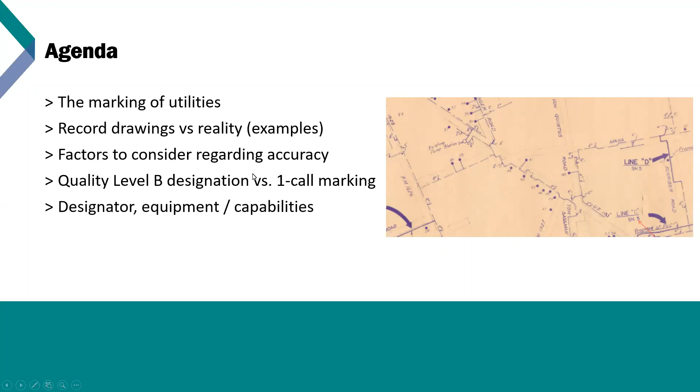I'm sure everybody is probably familiar with the one-call system. My intent today is not to knock the one-call system, but just to kind of maybe explain a little bit more to folks who might not be completely familiar with how things work.

The one call guys have a very tough job. These folks are typically asked to show up to 30 to 40 different sites a day and mark anywhere from one to multiple utilities in a very short period of time. I'm sure also, as most people have experienced, they probably had some issues with getting folks to mark the lines if they're calling a design ticket or even for excavation, as well as lines being mismarked.

A lot of engineers use the survey or the design ticket. This is a free service. The issue there might be is that there might be 6 owners that show up on the ticket, but it's pretty typical for only 3 or 4 of the owners to actually come out there and mark their lines. Some may even call or may even respond to the ticket and say there's no conflict because they know there's going to be no excavation.

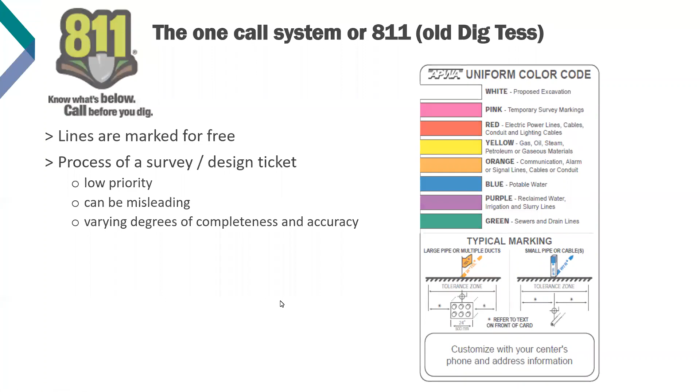So with all that said, if I was a designer, I certainly wouldn't have a very good comfort level. The intent here is just to impress the need to always at least request records. The interpretation of the records is another issue.

If you call in a design ticket and have surveyors collect those marks, they're considered quality level D, which is the lowest quality level. Even though one-call folks use, for the most part, the same equipment as a SUE person, there are several reasons the ASCE doesn't necessarily trust the accuracy of that information. They don't trust that those folks have been properly trained, and they don't trust that the equipment has been maintained or is regularly calibrated.

This often leads to some very bad results, and the reason for that is just experience from many folks. As you can see in the marks there, in the pictures, the picture on the left is really confusing.

If you were to go out there in the field and see the electric mark in red in the center of that island, and then you have a phone duct mark right at the curb line, well, one's on top of each other. But it's a pretty good chance that those aren't actually on top of each other.

As you look a little bit to the right, you have another set of phone duct marks, and the gas guys marked on top of the phone. Again, I think it would be pretty unlikely that those two lines are buried in the same trench. That really makes it tough for someone to distinguish what's good and what's not good.

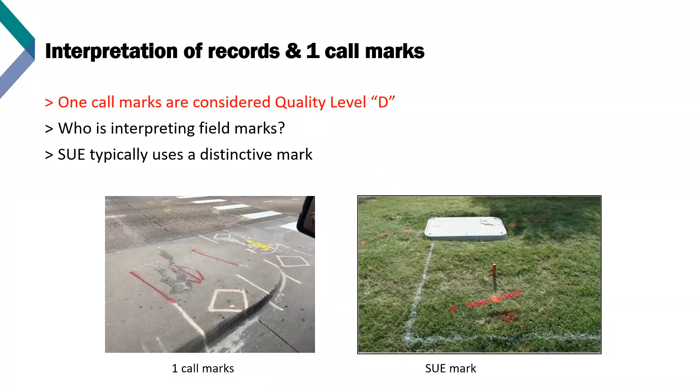There are very often misleading marks out in the field. In this case, crossing an entrance to a neighborhood, the person marking the electric ducts has 14 separate marks going across the curb line, spread about 12 feet wide. Well, there's a pretty slim chance that there are that many cables spread that far apart.

You'd be much more likely to find, if you were to dig a hole there, something like in the picture below, where there's just a couple of conduits - these red lines here - not more than probably 3 or 4 feet across. So again, if you're excavating or designing there, that's some very conflicting, very deceiving information.

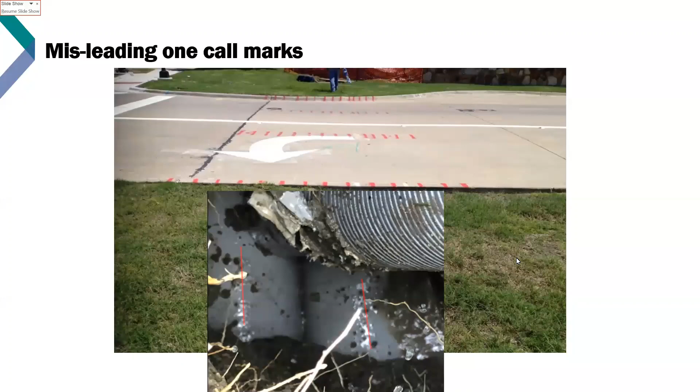So more confusing marks, similar to the ones on the previous slide - electric marked on top of phone. This one's a little clearer picture of what we just looked at, but I just came across this the other day, and I was just trying to figure out, wow, what the heck is going on here? How did somebody do this?

Again, there's a variety of different marks - the 3 lines in red are trying to indicate primary electric. The marks with the diamond in the middle, are they trying to indicate a duct bank or just a single duct? Again, very, very confusing if you're out there trying to interpret what's going on.

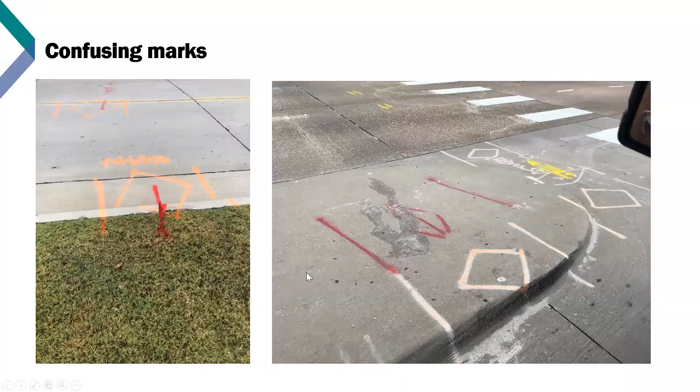Another example of the utility congestion and an issue that everyone faces, be it a utility locator, a one-call locator, a SUE technician, or a designer, is congestion. This actually is right outside of my office, where I think there's 10 different fiber optic owners who have structures all very close to each other. And it's just a congested nightmare out there. If you were to try and interpret all the marks, some of the marks are a little faded there in the picture.

I think even if you were to ask and request records from these folks, you would get a wide variety of accuracy of records, anything from maybe just an orange line on a Google Earth map to possibly an as-built that gave you a distance back of curb. But it would be very tough to compile all that information because all levels of accuracy would be so different. There'd be a lot of interpretation needed there. Again, kind of the reason for this presentation today is to focus on the issues of interpreting records and field marks, so that a designer can have accurate utility information to work from.

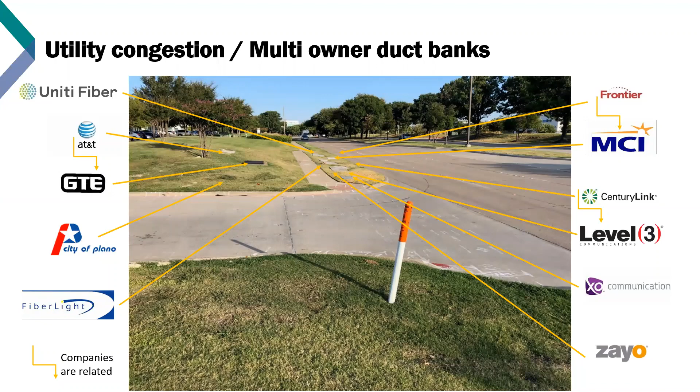Another picture in a very similar area. Just sometimes it's amazing to me how many lines are in the ground in some of these areas. Oftentimes these multi-owner duct banks will have lines that are running together in the same duct bank. In this case, while the structures are close together, the lines spread out for almost 30 feet, almost from the back of the curb, 30 feet behind it. So really, if you're using a design ticket or don't have an SUE person, or hire an SUE firm to map all this stuff, you could get a wide range of utility mapping to use.

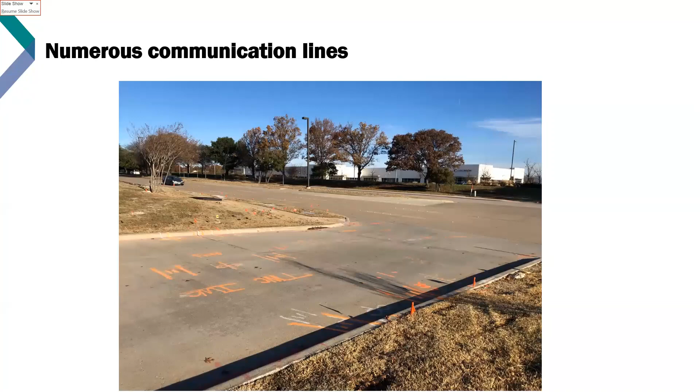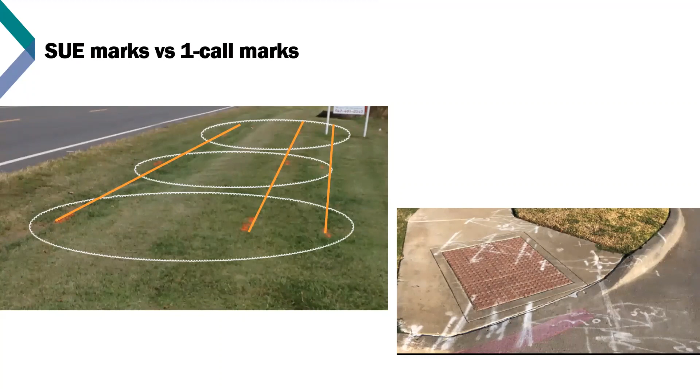I think a big question that I always have when somebody sends me a file and they have utility lines shown on it, the first thing I always ask is, where did this information come from? Was it compiled by a junior engineer, an EIT, by a CAD person? How did they come up with it? So to me, that's just really critical to know that up front. You can get some very, very misleading information on these types of drawings. There are some very obvious symbols, such as B, to indicate buried, but unless you know some of the codes to tell you if the line is overhead or buried, the size of the line, distances between structures, etc., it's very difficult to incorporate this information into a topographic drawing.

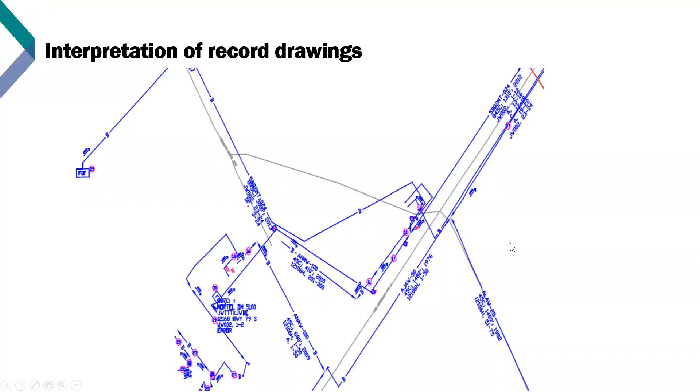It's kind of amazing that this information, or the way that they recorded their information now. It's obviously a secrecy thing, but it really makes it tough for anybody who has to use this record drawing and is worried about utility conflict.

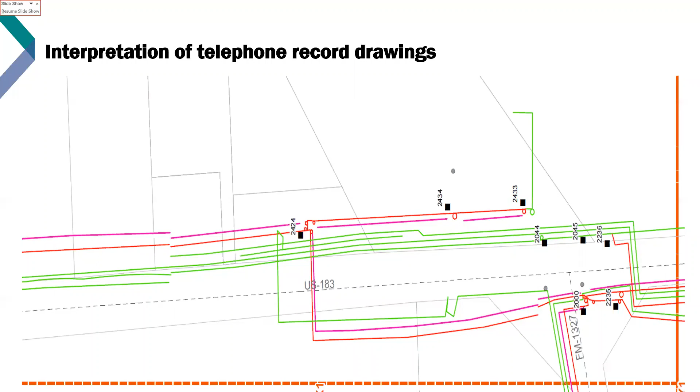This drawing, actually in scale, covered well over a mile. Luckily, it was only a 2-inch water line, so it wasn't anything critical or hard to relocate, but it wasn't traceable. It was plastic, and it was just amazing and surprising for a utility owner to provide a drawing of this level of accuracy, or I should say lack of accuracy.

As it ended up, once we pushed them a little further, the client felt it was going to be in conflict with some culverts they were extending along this road. The water owner then came forward and said the water line is outside of the right of way other than where it crosses the road. So initially, while the client had us digging probably 10 test holes, almost all of them went away other than at the point of crossing. Just a very interesting example of some of the information you get from folks.

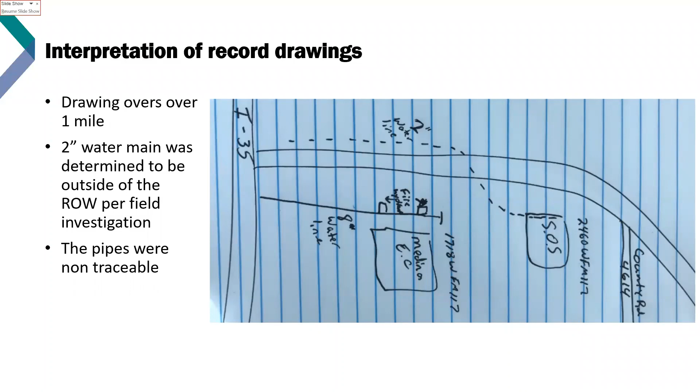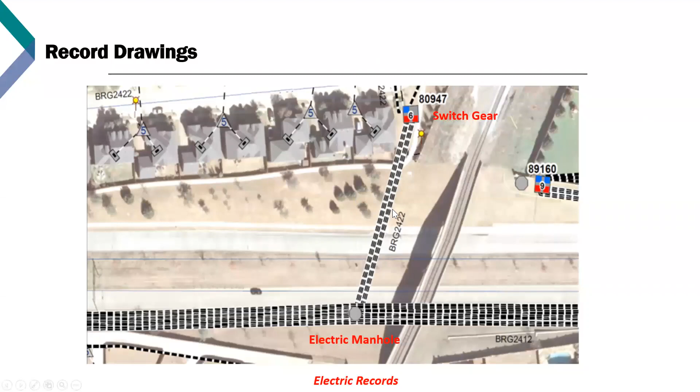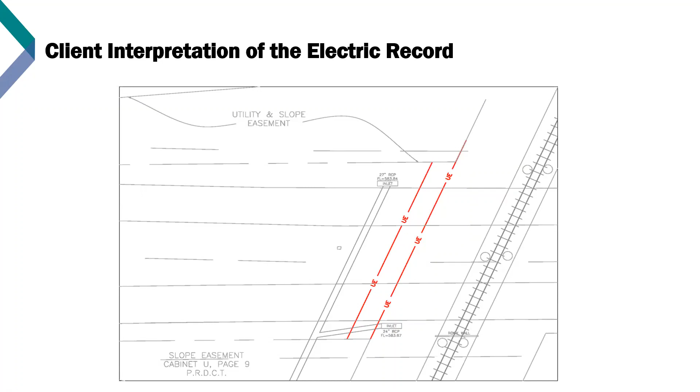They took this information, and the two red lines with UE on it were their interpretation of these two lines that cross the road here. So their interpretation was pretty reasonable and realistic, and they were ready to start their design based on this. But then we were asked to go out and actually map the utilities ourselves, and the line was over 100 feet off, and the alignment was drastically different than how the record showed it and how the owner depicted it.

What this ended up doing was they were going to do some work on the drainage here and in these inlets, and by finding the line where we did, it ended up saving them a couple of test holes. So I can't impress enough the importance of using an SUE provider to get accurate mapping, as opposed to relying on the call system or utility company records.

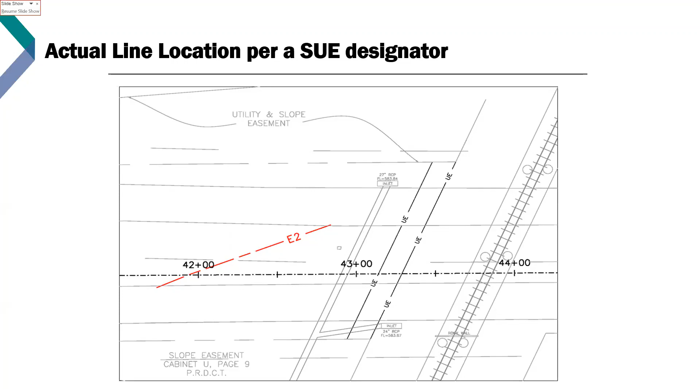Our crews went out, staked those locations, but before they dug, they pulled their equipment out to mark the line, and they found it 16 feet off. As it turned out, they didn't need the holes. But since they thought their information was correct, they asked us to excavate the holes anyway, and we did just to confirm the line. Had they requested a quality level B initially, as opposed to quality level A, they probably could have gotten the information they needed for about half the price.

I think when people see utility records, or marks in the field put down by the one-call folks, they take it as the gospel, and a lot of times the information is very inaccurate.

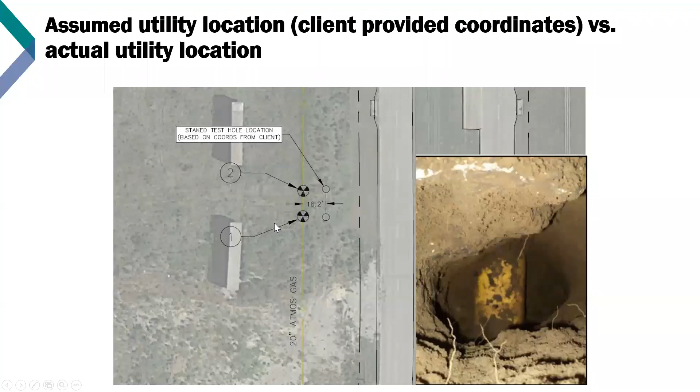I've come across two instances where I found issues. One, the Railroad Commission indicated 3 lines crossing a brand new roadway, so we were asked to excavate on those 3 lines. As it turned out, there was only evidence, only signals, only marker posts on 2 lines. I went back to the Railroad Commission and let them know, and upon further investigation, they determined that the person who added the information had accidentally duplicated one of the lines, so they ended up removing a line. They probably showed that mapping for about 5 miles.

I also recently went on a project south of Houston, in kind of what I'd call a pipeline alley area. The Railroad Commission showed 8 lines crossing our project, but as it turned out, we found 11. There was one owner who was not identified, and 2 of the owners had multiple lines where they showed just 1 line. So again, no intent here to knock the Railroad Commission—it's a great resource, a great website—but the point is just to not necessarily believe everything you see on paper.

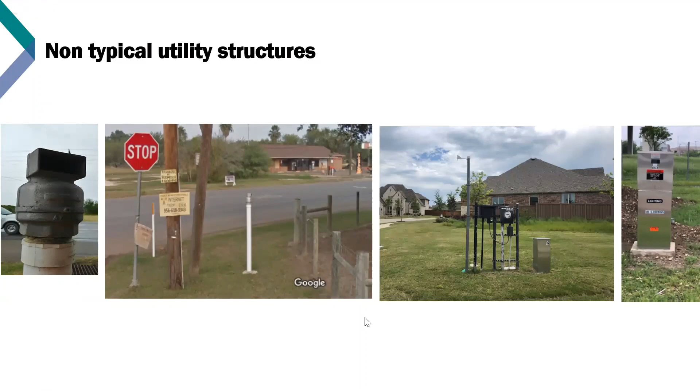Again, more on utility structures and the correct identification of them. A lot of times I've seen structures like these called out as just the infamous green box. Some are labeled pretty good — in this case the owner's labeled. It's always good that the surveyors or whoever's collecting the information knows ownership. But it's really important to get the utility right, whether it's phone, electric, cable TV, or whether it's a handhold. It's really important that this information is relayed correctly.

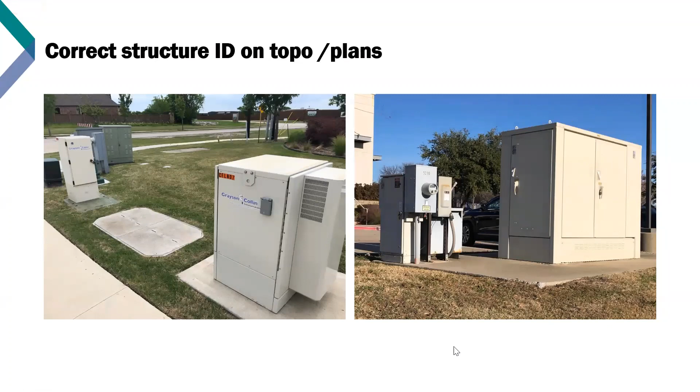I had a job where we were in quality level C and D, just adding information per records for a client. This structure on the right, a pole with an electric meter, was actually called out as a transformer. I was able to Street View this area, but that's all I could see was what this was, and it ended up causing a site visit to go out and determine that it was just a meter on a pole and not a transformer.

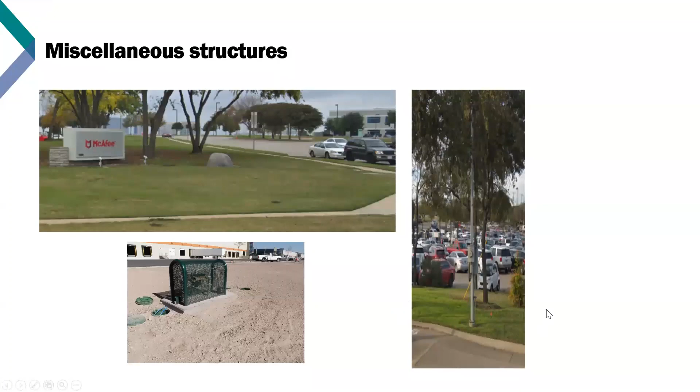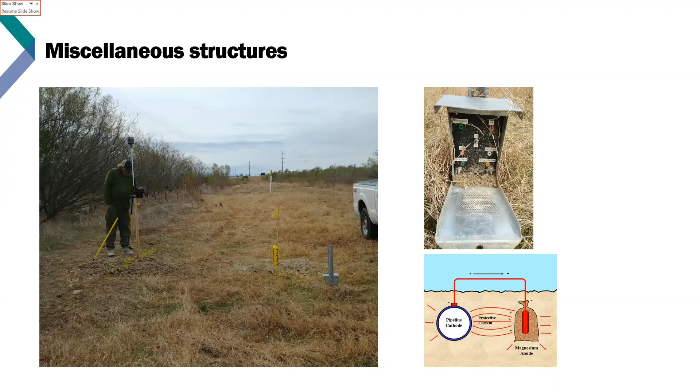test the corrosion on the pipe. The concern was that since it wasn't in the topo, was there an anode bed or some other structures underground in this area that we felt it would be very important to let the client know. So having photographed this and sent it to the owner, we were able to determine that it was just a single anode, not a bed, not a string with 10 anodes that was 50 feet long. But again, it's really important that everything gets collected in the field and called out accurately.

I'm sure most folks are familiar with GIS. Records today are in a GIS format. While it all looks great on a computer screen, its intent is really not to be accurate. It's more for inventory purposes, to let you know that there's something there. If you ask anyone who's a surveyor, they will tell you that GIS stands for 'Get It Surveyed,' and that's something I'd have to agree with. So keep in mind, if you get records where all the lines are nice and straight, the accuracy is probably pretty limited.

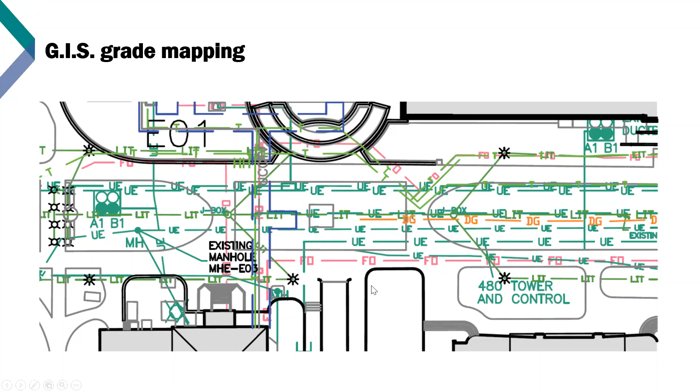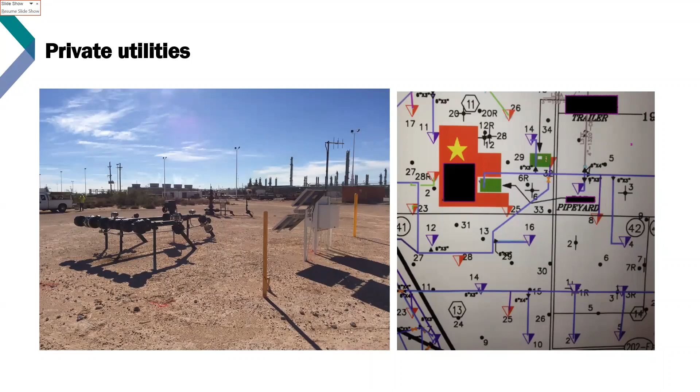I'm going to run through just the general SUE quality levels, and touch on some more SUE-specific information briefly. I'm sure everybody's probably already familiar with the quality levels, but if not, hit me at the end for any questions.

The definitions quickly: Quality Level D just involves obtaining record drawings. This is usually more for when you're doing a long corridor, running a pipeline or power lines, and you're looking at records in general just to take the least path of resistance.

Quality Level C is obtaining records from the utility owners and referencing them into a topographic survey. Quality Level B is when you hire a SUE provider who will go out and mark the lines, giving you horizontal accuracy. Quality Level A, the highest level, is when a vacuum truck is used to actually expose the line and provide the client with X, Y, and Z exact location of that facility.

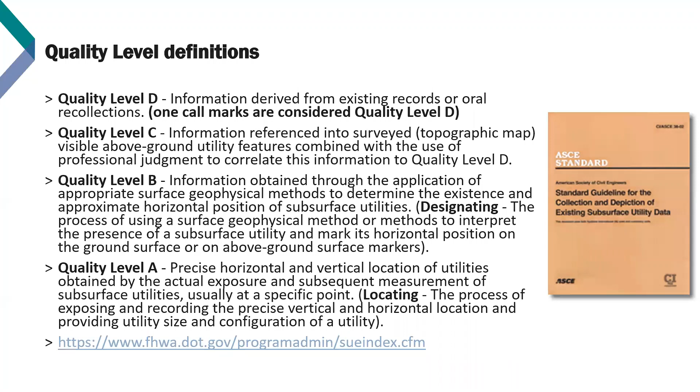So Quality Level B is what we've been talking about for the most part today. I just want to point out some of the differences between what a SUE technician does as opposed to what a one-call person does.

When I spoke earlier that ASCE does not recognize one-call marks as Quality Level B, it's for a variety of reasons. Typically the SUE tech is trained better. The SUE tech, when he goes out to a site, has to mark all types of lines, whereas a one-call person will typically only mark one utility or maybe a few. One of the huge benefits the SUE tech has is they go out in the field with utility records from all the owners, so really you have all the pieces, or the majority of the pieces of the puzzle in your hand, as opposed to just having one or two or three.

It makes a huge difference. The SUE tech also typically has a variety—maybe 2, 3, 4 pieces of locating equipment—with a variety of frequencies they can use to help resolve congested areas or utilities that are poor conductors. A one-call person, at least in my experience, is typically only sent out in the field with one piece of equipment, so it definitely hampers them a bit. So while both folks go out and mark utilities, one is typically far more trained and far more accurate.

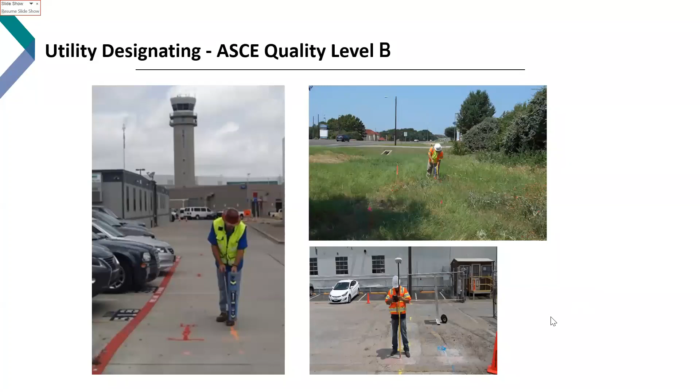The equipment the folks in the SUE industry use is the same as the one-call folks. The training is a little different, but some of the challenges for anyone who has to locate utilities are the number of available connection points, the material type, the depth of the utility, and utility congestion.

Now, these instruments a lot of time we're asked to provide an electronic depth. While these instruments all have that feature, the manufacturer will tell you the accuracy is plus or minus 10%, but that's in pristine conditions, like in a laboratory. As soon as you leave the laboratory and get in the field, I don't consider any of those pristine conditions. So most folks typically do not provide electronic depths for that reason, because their accuracy can be suspect.

Field people use them as a guide. So if they are marking a water line and they get a depth of 12 inches, they probably know they've jumped onto a different conductor. So the depth function there in the SUE industry is really more for interpretative purposes, to say, okay, I have good signal strength, I have a believable depth, I'm on the target conductor.

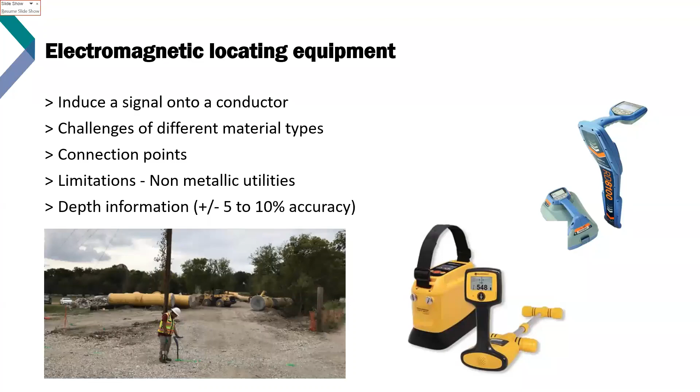Now, for what it's worth, GPR is not very good in North Texas and a good part of the state. It does work pretty good out west, Midland area, or along the coast. GPR has some limitations, so typically we would only use it if we can't find a line or if we're specifically asked to use it. There are companies out there like Exxon that want you to do everything you possibly can, almost as an insurance policy and doing your due diligence. So they'll ask for it, but typically I advise folks that it's not going to do them any better or get them any more information than the electromagnetic equipment we just looked at.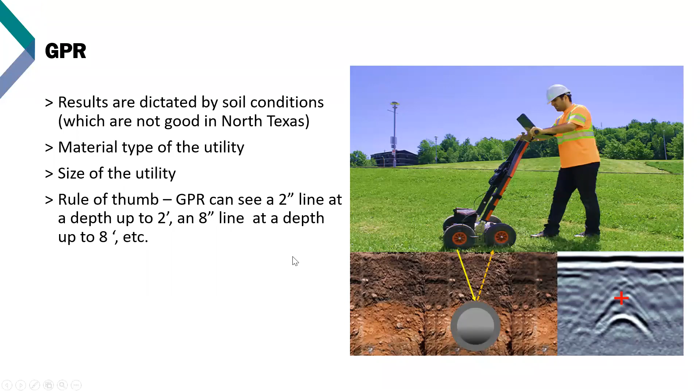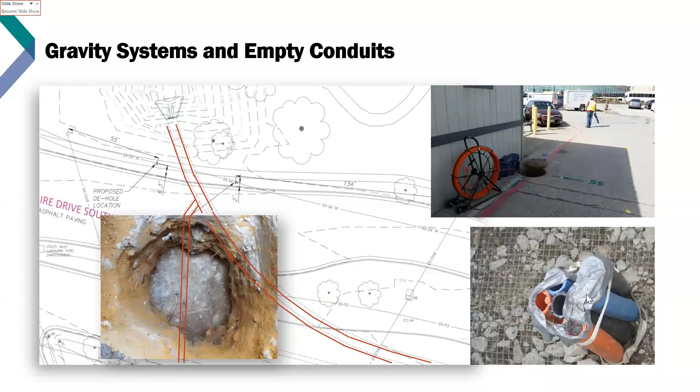It could also be inserted into empty conduits. Folks have seen this a lot too out in the field where they may be on a site where conduits have been installed for future use or just haven't been utilized yet. So you can insert this rodder into that and trace out the line with very good accuracy.

Utility designation, that is quality level B. There's typically an approach there. The process is to trace a conductor from a known structure to a known structure, such as valve to valve or manhole to manhole. You also trace from the best conductor to the worst conductor. Typically you start with something like cable TV, which is a great conductor and very shallow, and then work your way down through phone and electric. Then you get to pipes, which are deeper and not as good conductors, and get the gas, water, force main, etc.

One of the beauties of being a SUE person as opposed to a one-call locator is to use something called the EOI information. So if you are trying to trace out a line and you lose the signal, you use the EOI, the end of information call out, and then depict that line on your mapping at a different quality level.

One-call folks typically have to put a mark down, so even when they don't get a good signal or they're not confident, they have to put a mark down. Now, if a surveyor has to collect those marks, none of that gets back to the engineer or the designer to say that this mark was put down with very little confidence. That can be a real issue.

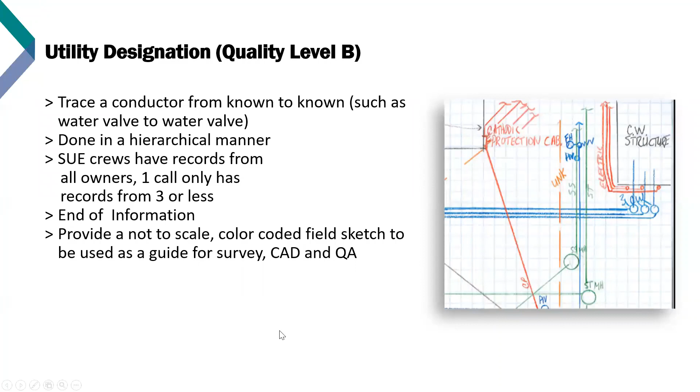Again, this is signed by a PE, and if the quality levels are called out, then it's typically signed by a PE, and this information can be delivered in AutoCAD or MicroStation format.

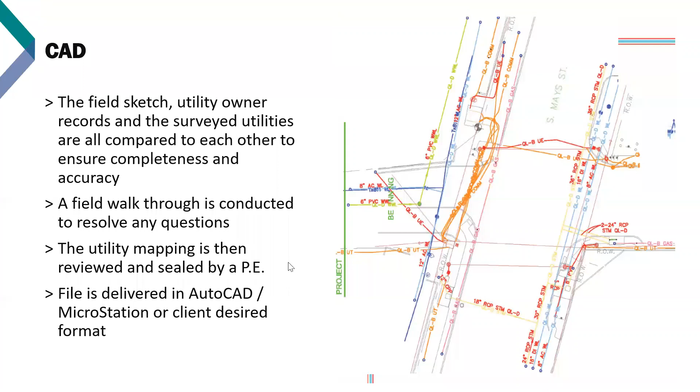Another example of quality level B work. The difference there, when you see the letter identifiers, you have the quality level D after it, you know that those lines are just shown as per record, so the accuracy is plus or minus. When there is no letter callout, such as on this T line here, that means it was designated and it's quality level B, and you can be pretty confident in the accuracy of the line.

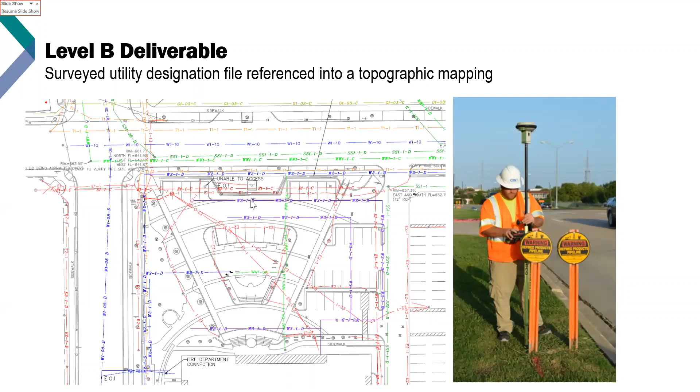I just have a few slides left. So if you happen to run into a site where there are non-metallic utilities and they can't be traced, there are still ways to find them.

And you can see there's one, two, three - I think that was a duct bank down there. So there are other alternatives.

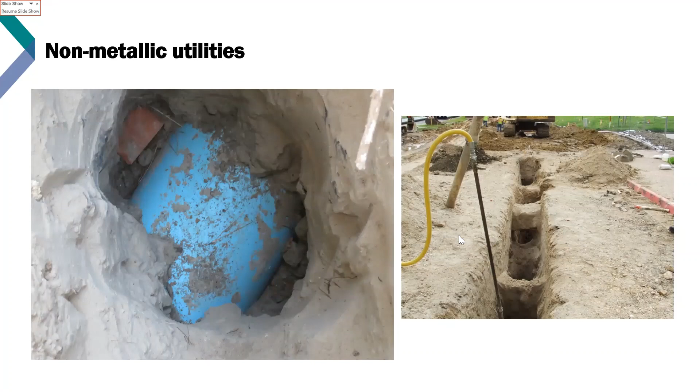And with that, that is the end of the presentation, and I'll be glad to answer any questions.